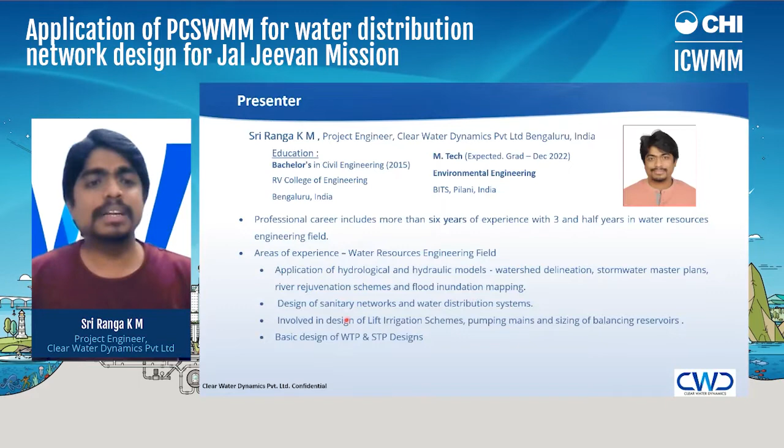So here is a brief of my bio. I am Sriranga KM, working as a project engineer at Clear Water Dynamics Private Limited, Bangalore, India. I have my bachelor's in civil engineering, and presently I'm enrolled for my master's in environmental engineering, and I'm expected to graduate from it in December 2022. I have about 6 years of experience in professional engineering. In that, about 3.5 years in water resources engineering, and I have been involved in developing hydrological and hydraulic models for stormwater master plans, river rejuvenation schemes, and flood inundation mapping. I have also been involved in design of sanitary networks and water distribution systems.

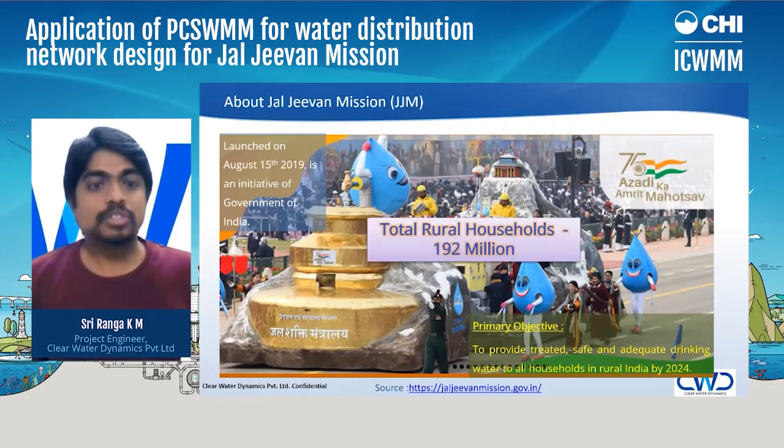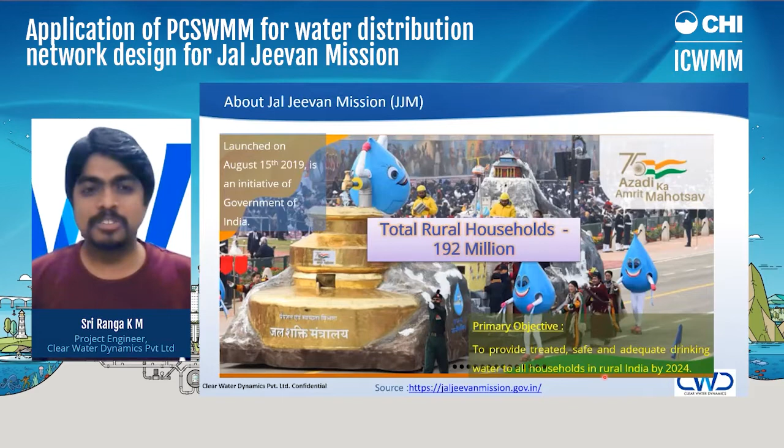Now, to get started, what is Jal Jeevan Mission all about? Jal in Sanskrit means water, and Jeevan means life. So the mission of this project is to provide safe, treated, and adequate drinking water to all the households in rural India by 2024. The project was launched in 2019. So in a short span of 5 years, the plan is to provide water to 192 million rural households in India. So you can imagine the scale at which this project is being mounted. And the total budget of this project is approximately 53 billion US dollars.

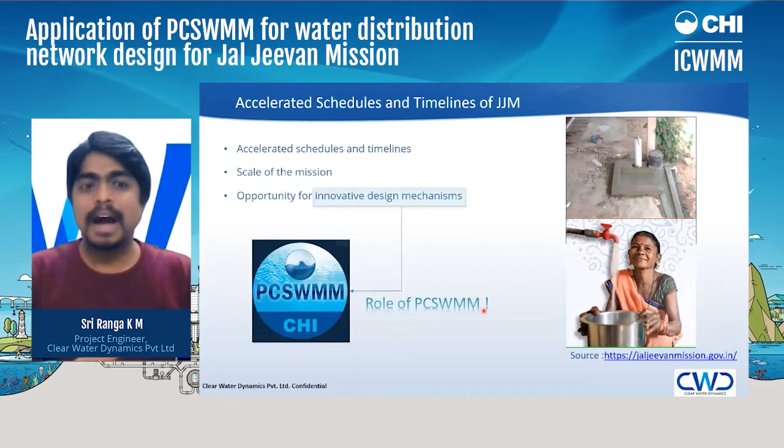So with the accelerated schedules and timelines, and also the scale of this mission, there was an opportunity for private sector consultants to come up with innovative design mechanisms that reduce the time required for designing a distribution system. And this is where we at CWD, with the help of PCSWMM software, have come up with a very innovative design mechanism, which once understood can be used to replicate designs for hundreds of villages in a short span of time.

Now, before we discuss in detail what the methodology is all about, let us first understand what a typical multi-village water supply scheme looks like. So, when we speak about any water supply scheme for that matter, one of the first things a designer does is to identify a sustainable water source. It could be a river if the area of our project interest is blessed with rivers. And if there are no rivers, then we'll obviously go for a subsurface water source. So we'll construct an intake structure in that sustainable water source location, and by gravity, you will take water to the jack well.

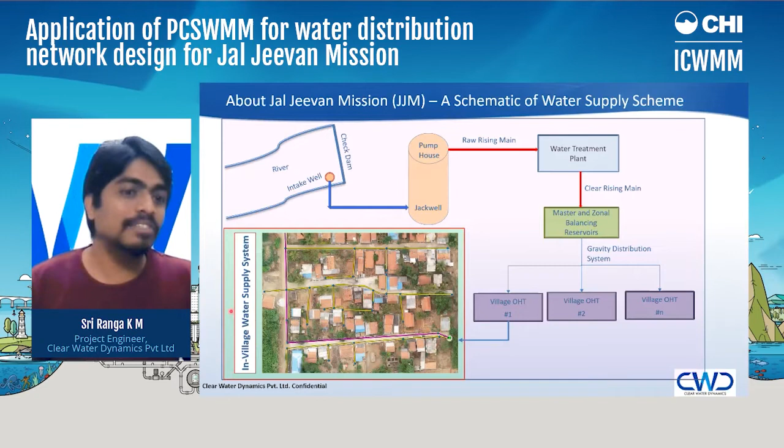So depending on the topography and terrain of our project interest, this number of villages may vary from 25 villages to even 500 villages. So now let's just start with one of the villages. Once the water reaches a particular village overhead tank, we need to have an in-village water supply scheme so that water can be supplied to individual households. So this in-village water supply system is what we will be discussing in detail now.

And in survey, the first activity is to do a requirement survey to understand the topography. And once you are done with that, a survey team will be sent to carry out topographical survey. Before, let's say, 5 years or 10 years before, usually it was carried out using total stations or DGPS. Now with the advent of drones and them also being available at very cheap rates, we have gone with a drone survey here, and we'll also send one more set of survey team to collect total household information.

So once we are done with collecting all the data that is required, we'll calculate the water demand that is required for that particular village, and we input these demand calculations into a modeling software. And with the total pipe network digitized and constructed, we'll carry out the modeling iteratively to arrive at pipe diameters, ensuring that there is enough residual pressure in the endpoints.

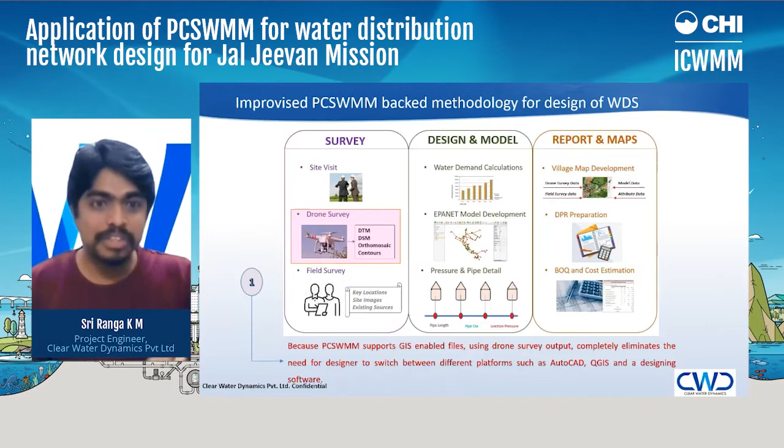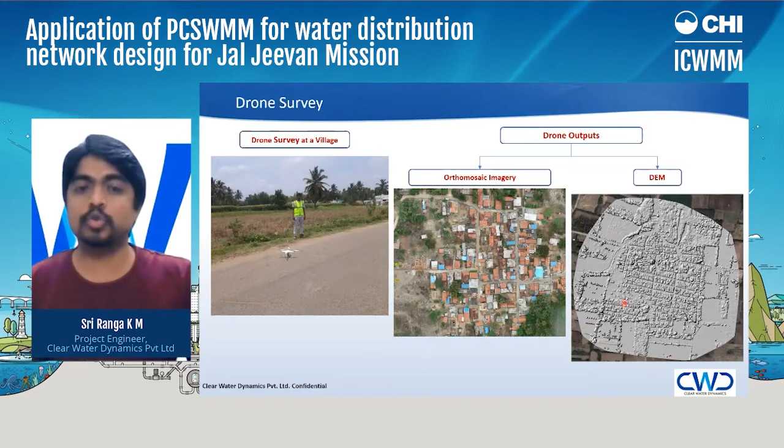So this is the first step where we have been able to cut down on the time needed for the designer to shift between different interfaces and do all the activities within PCSWMM itself. When we talk of drone outputs, the first output is obviously very high resolution orthomosaic imagery. We can get resolution as high as 1 centimeter or 2 centimeters now, and the other output is digital elevation model. So we can use this information to designers' advantage.

Now moving on, once we have drone survey completed for a village, and we have orthomosaic and DEM as our outputs, what we did was we created a village map again within the PCSWMM software itself with the help of a new polyline shapefile, and that village map was printed and given to our survey team to go and collect household information in each road.

So now once this field activity is done, usually another set of team is sent back to the site to validate the data collected. But what we have done here is, because we have very high resolution orthomosaic imagery, we have created a house count shapefile within PCSWMM itself to validate the data collected. Now, by eliminating the need to go back to the field once again, we are saving about 1 to 1.5 days of time. So this is the second step where we have been able to reduce the time required for designing.

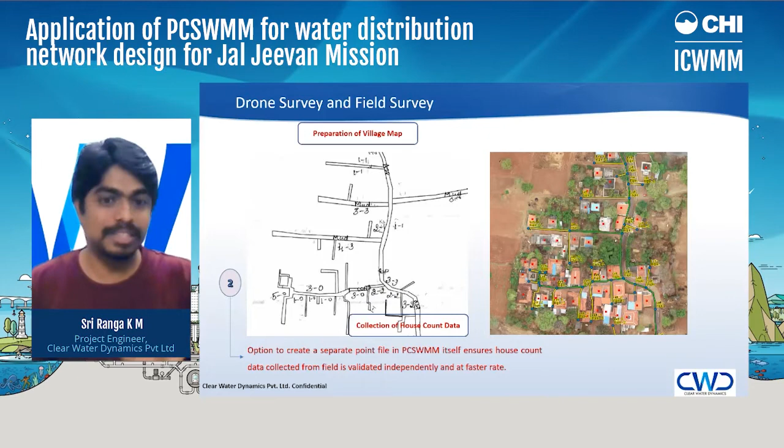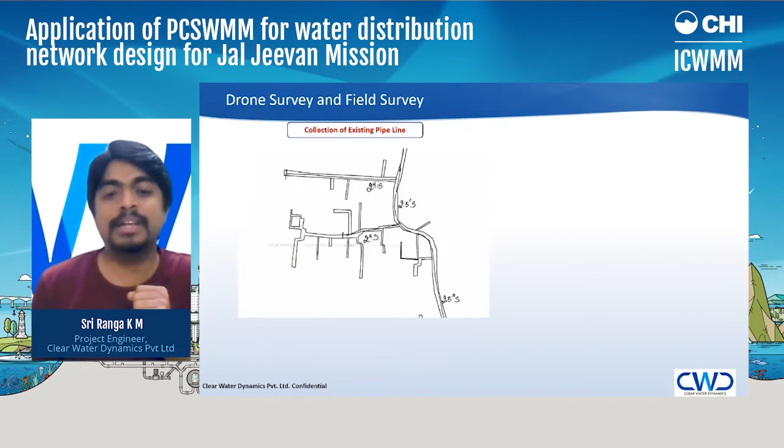And so the next is another copy of this village map, where existing pipeline infrastructure information will be collected. So you can see here that in this road there is already an existing pipeline of 2-inch diameter. Whereas if you come to this road, the existing pipeline is only to this point, and here there is no pipeline. So with this data collected from the site, we have input this information into the PCSWMM interface using description and tag columns.

So, for example, if we talk of this road, which is here in this village map, we have used the description column to input, say, existing pipeline and proposed pipeline. I'll come to this point later, where I'll explain in detail how this is very helpful in a quicker estimation process. And we have used the tag column to input the data of the respective road classification on which this pipe is being laid. So you can see here that it is CCNS, which means CC road with no shoulders, whereas here you can see it is mud road.

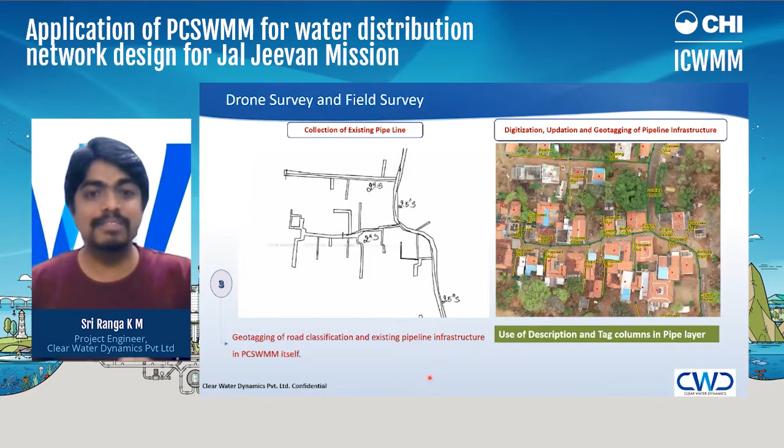This data is input here because when we are estimating, the cost required for excavation in mud road is different from the cost required for excavation in CC road. So we have been able to geotag the road classification and also the details of existing infrastructure in the designing software itself. There is no need for us to go back to QGIS or AutoCAD to look at this information. We can view this information in PCSWMM itself.

And now we have the data that we need for carrying out designing, and we have digitized the total pipeline network. The next thing that we need to do is allot demand. The mandate we had was to consider 4 people per household as a standard, and per person the demand to be considered is 55 liters per day. So when we consider 4 people and 55 liters per day and calculate the base demand per house, the demand works out to be 0.003 LPS.

That is, if there is one house on a particular road where the pipeline is being laid, then the demand becomes 0.003. And if there are 5 houses in that particular length, then the demand becomes 0.003 into 5. So we have the house count shapefile that we have used for validating site data. And as an extension of that, we have used the description and tag columns within PCSWMM to input the total number of houses on the left side of the road and the total number of houses on the right side of the road.

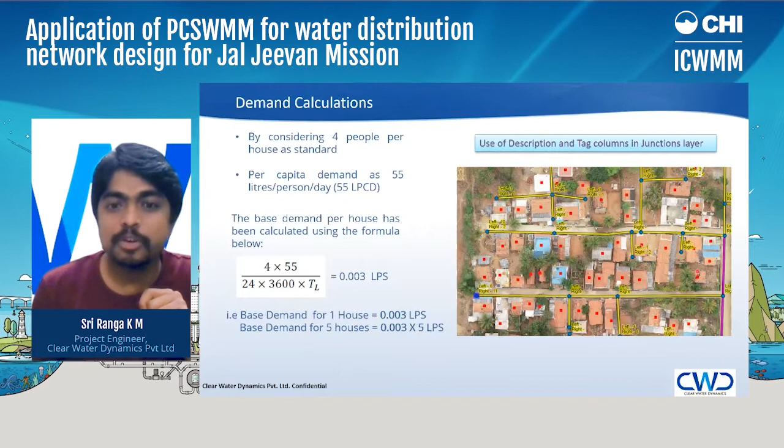So, for example, if you take a look at this pipeline here, one second. You can say this is a secondary distribution pipeline, and there are tertiary outlets here. If we see this portion here, there are 6 households, and we have input that in the description column because this is the direction of flow. It is on the left side of the pipeline, so I have marked it as left side here. And on the right side of this pipeline, if you count it, there are 11 houses. We have input that into the tag column.

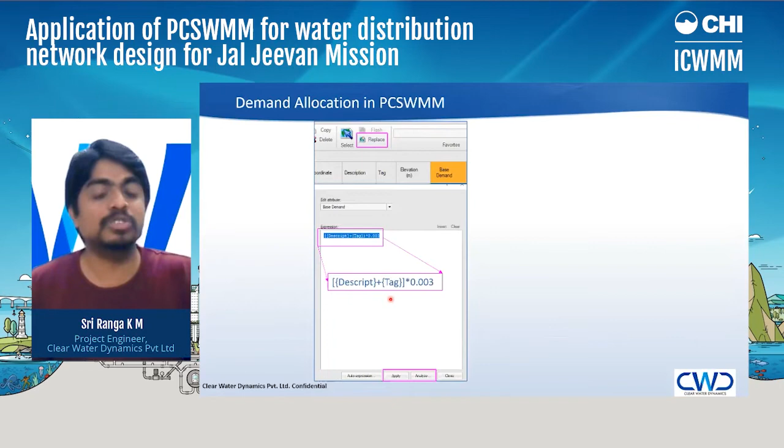And next we have used the replace option that is available in PCSWMM, and we have inserted the formula (description plus tag) into 0.003, which means the sum of total houses on the left side of the road and total houses on the right side of the road, whole sum multiplied by base demand per house, which is 0.003. By doing this in a single shot, we are able to allot the demand to the complete distribution network.

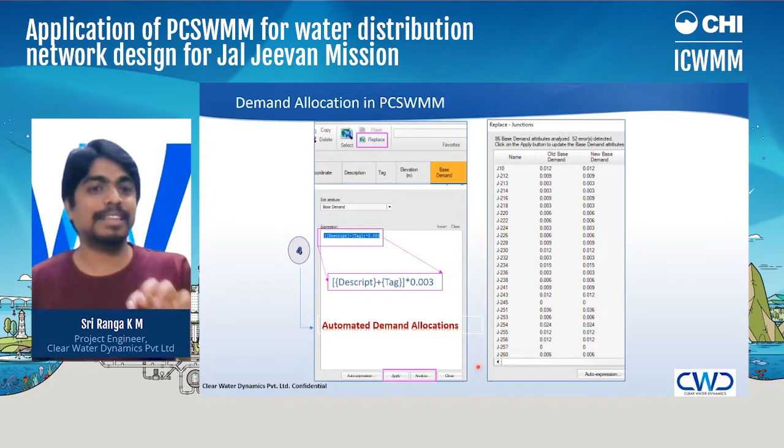If you are doing this in other software, you need to create an Excel sheet. You have different road classifications, say road A, road B, road C, depending on how big or small the area of extent is, and you need to have house count and calculate the demands in Excel and then copy paste that back into the designing software. But in PCSWMM, we don't have to do that. With the help of the description and tag columns and this formula here, we are able to automatically input it, and the house count information we also have as a part of validation, so that need not be created again. This again reduces the time that is required for designing.

And of course, as I was saying, the second output of the drone survey is the digital elevation model. Simply by using the elevation from DEM tool, we can assign elevations to all the junctions at once in the model. If you're doing it in other software, you will have to create a contour file, and you will have to convert that contour file into a point file.

And if it is not georeferenced, you will have to georeference it, and then extract elevation data from that point file. It will involve 3 to 4 steps before getting the elevation. Whereas in PCSWMM, you can do that in a single shot. This again saves the time required for the designer.

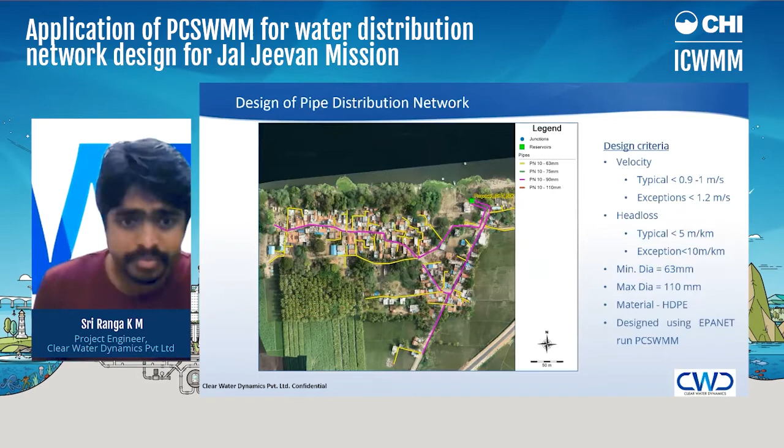Now, with the pipeline completely digitized and with the demands allotted at the junction, all you are left to do is follow the hydraulic design parameters and design what is the diameter of the pipeline that is required to carry the water with sufficient residual pressures at endpoint. So here we have made sure that the velocity in pipelines is not more than 0.9 to 1 meter per second, and we have kept the frictional head losses to less than 5 meter per kilometer, and we have designed the distribution network.

And once we are done with designing, as I showed in the digitization of pipe network, we have input existing and proposed pipeline data in the description column, and its respective road classification in the tag column. And because PCSWMM is GIS enabled and it has an inbuilt projection system, you get the lengths automatically. You don't have to input that manually. And of course, we have this diameter from our hydraulic design.

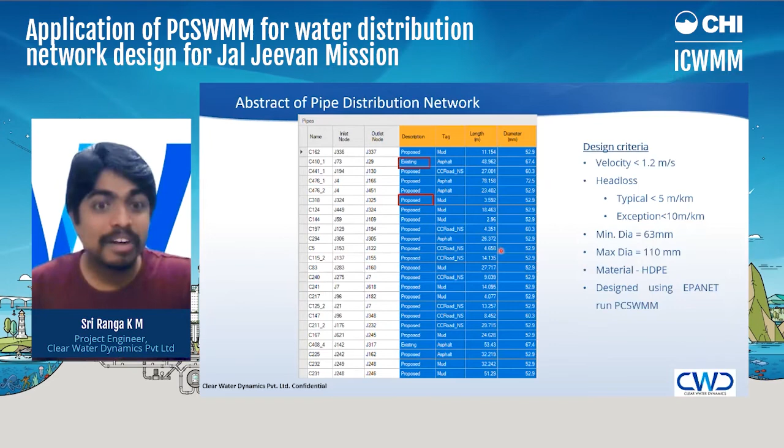We have all the data that is required for estimation in the designing software itself. So all you need to do is export that into an Excel and use pivot table. Once you do that, you will get a summary of what is the total length of existing pipeline, what is the total length of proposed pipeline, along with its respective road classification.

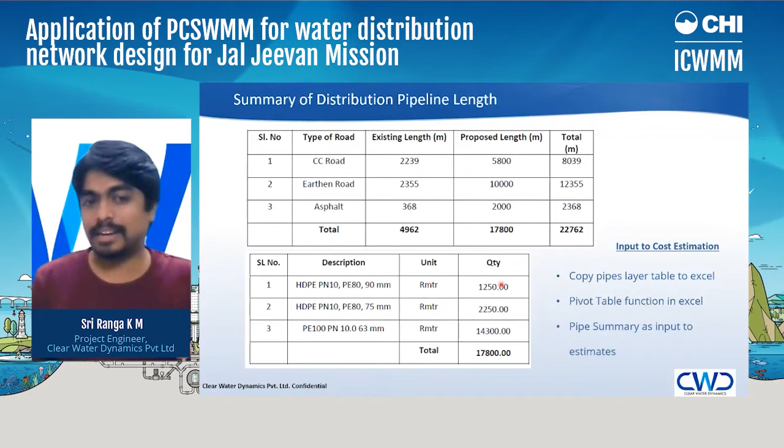For example, here the existing pipeline in CC road is 2,200 meters, but we have proposed an additional 5,800 meters of pipeline in CC road in that particular village. So we have all the data that is needed for cost estimation here. And of course, we'll also get the different diameters of pipe that is required in that particular village.

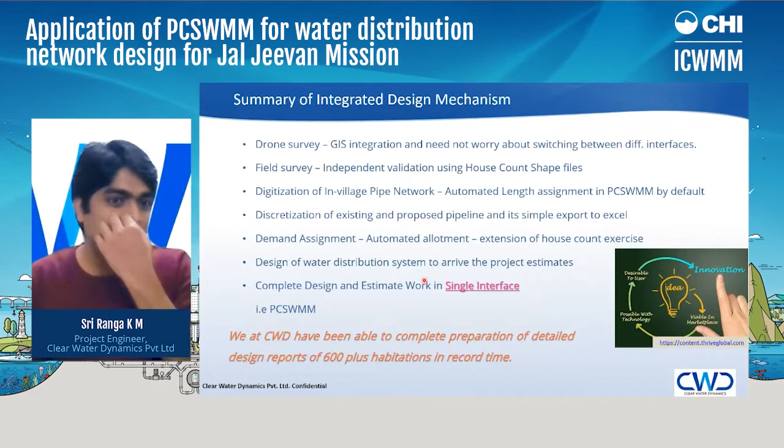So in the last 15 minutes, we have understood with the help of drone survey and the tools available in PCSWMM, we are able to simplify the process of designing. So first, starting with drone survey output, we have eliminated the need for designer to switch between different interfaces, such as AutoCAD and QGIS, and we have independently validated the house count information within the designing software itself. And as far as digitization of pipeline network is concerned, a length is automatically assigned to all the pipes by PCSWMM itself. We don't have to input that manually.

In other softwares, you'll have to worry about stuff like what is the scale. Suppose you are inputting an orthomosaic into a designing software, you have to first set the scale 1:100, 1:500. Then you'll have to assign the length. We don't have to worry about that here in PCSWMM. And we have discretized the information that is very important for cost estimation in PCSWMM itself by using description and tag column. We also discussed how we have allotted demand using automated tools available in PCSWMM.

And with all the data in a single interface, and also designing happening in the same interface, what we have been able to achieve at CWD is we have been able to complete preparation of detailed design reports for 600 plus villages in a record time. If we consider a time frame between January 2021 to May 2021, in a short span of about 4.5 months, we were able to produce reports for 350 plus habitations. That is, on an average, we were producing about 60 to 70 design reports in a month.